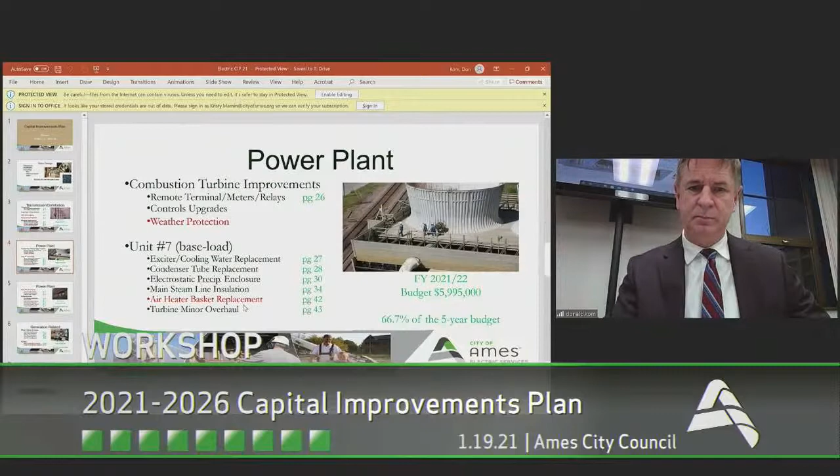Looking at Unit 8, as you're aware, we're about to start work on replacing some superheater tubes. That's in this year's budget, so that's why you're not seeing a sheet. However, that is the main step in how we're going to fix Unit 8, and we think it will operate just as well as Unit 7 has since we replaced those tubes.

The two other projects, again, you've seen before: the precipitator reconstruction, and in Unit 8 we'll be doing a turbine minor overhaul. Those sheets are found on 35, 40, and 43.

From an infrastructure standpoint, we're continuing work on the plant building itself. The reason I have this in red: we're about to begin a modification to the bathrooms. If you picture a plant built in the 40s, it's generally set up for male bathrooms and male showers. We're moving towards a unisex bathroom since we've added females to our staff, and we need to bring our plant up to today's standards. We'll be doing that in this next fiscal year.

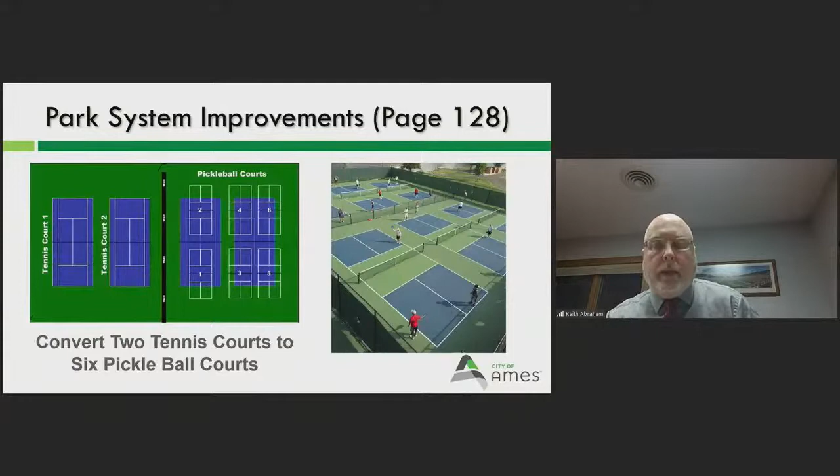So with park system improvements on page 128, this we did put in last year: converting 2 tennis courts to 6 pickleball courts at McCarthy Lee Park. We did receive a lot of feedback on this last year, that's why it was put in, and we'll continue to move forward. That is in year 21-22.

Weight room equipment - obviously we're hoping that the Healthy Life Center would pass, but the fact that it didn't, we do need to replace this equipment, so this is something that will be coming up in the next few years. So Carr Park bathhouse, we are going to be demolishing this, and then replacing it with a shelter and a restroom, and then we'll be putting some equipment out there for play and so on as well.

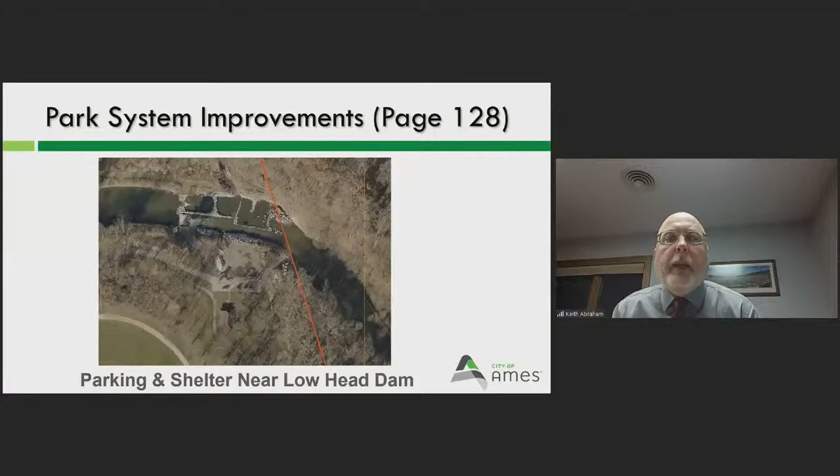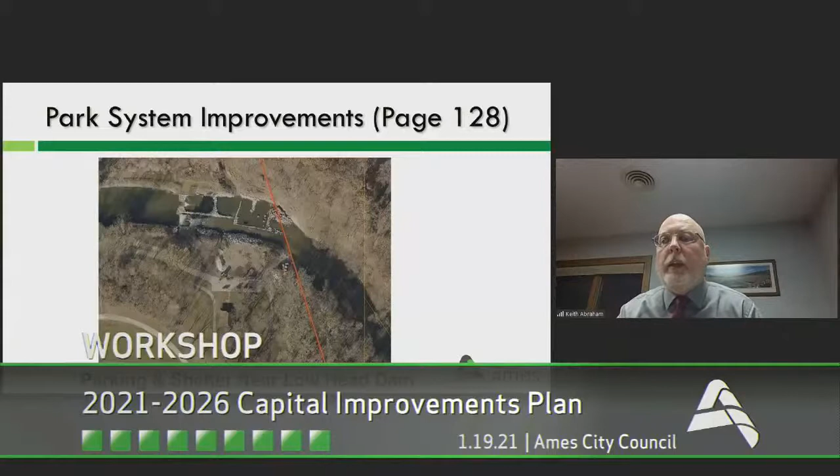What we really want to do is we actually have money in the CIP to replace the parking, also to put a new shelter in and new play equipment. We want to put the parking more to the south or bottom of the picture, and then have the shelter and playground to the north of the parking. Right now, if we left everything as is, if kids or people wanted to move from the shelter or play equipment down to the water, they would have to cross the parking area. So it's just something we want to do as well.

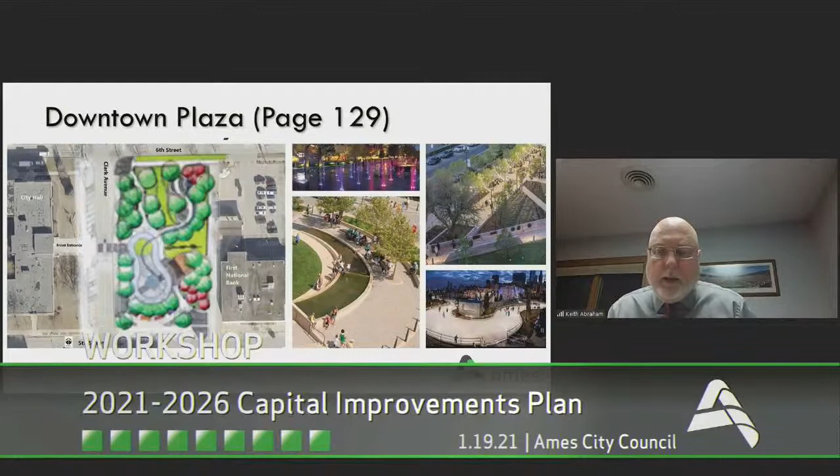If we move on to page 129, the downtown plaza, I'm not going to spend any time on this because there's a public input meeting on Thursday evening at 7 o'clock. The Confluence will be going through more in detail the concept and what that's proposed to look like. And then we'll be bringing more information to council next Tuesday, the 26th.

With Ada Hayden, again, this is another project that we put in last year. There is a group out there called Access Ada Hayden. So this is a canoe and kayak access. You can see you can put your canoe or kayak in, slide it down to the water, and for people with disabilities or mobility issues, they can do those kind of steps, get out and over their kayak, and lower themselves into the kayak. You can see an individual coming back in from being out on the water.

Right now with that, we do have $85,000 in the budget. $50,000 of that is local option sales tax, and $35,000 of it is from private donations. Just before the holidays, I did speak with that group, and as of right now they have raised about $22,000 out of their $35,000. So they're well on their way and continuing to do that. Again, it's a really good partnership between the city and another group out there to get this accomplished.

Playground equipment improvements—this is Sunset Ridge that was put in last year. On this page, there are 17 playground replacements over the next 5 years. This is something we have a plan for that goes out to about 2040, to replace all of our playground equipment.

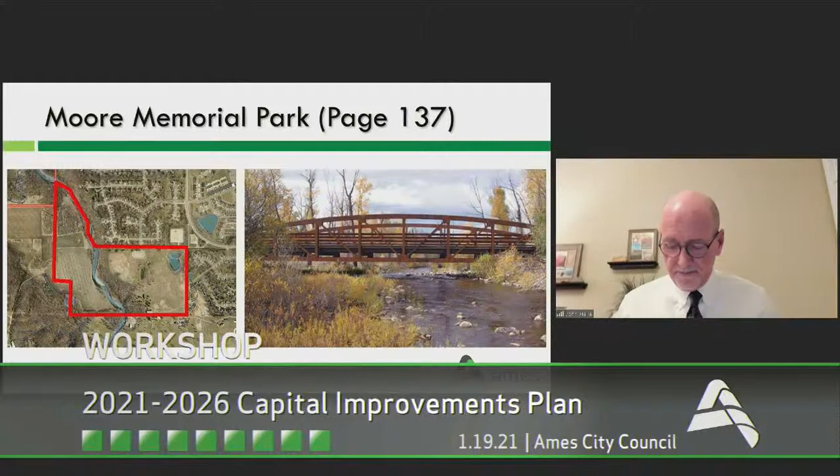Questions for Keith on this one?

Keith, is this going to be installed by your own staff? Is that $75,000 in the budget just for materials, or? Yes, it'll be materials - it'll be concrete. A lot of what you see, benches, some landscaping, a lot of that will be included. But the goal would be that our staff would install it, because it's a very attractive addition to that area, and certainly long overdue.

But it just seemed like the $75,000 seemed to be fairly modest for the beautiful concept. So I was just curious if the budget went over, I presume you have resources to draw upon to make up that difference to accomplish the project. Let's hope so. Okay.

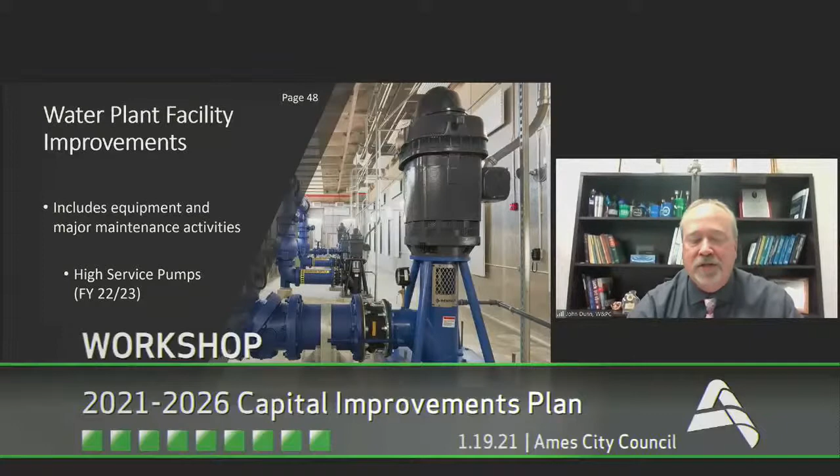So that's just one example of several I'm going to show you of how projects from multiple departments are all kind of interwoven together.

Page 49 is our distribution system monitoring network. This is going to allow us to do real-time monitoring of multiple locations in the distribution system. Right now, there's just a handful of spots that we can see, and getting more data points coming in will allow us to detect water main breaks quicker.

By triangulating between multiple sensors, we can pinpoint quicker where the location of a main break might be. It'll also, in the event of a major main break, allow us to be quicker and more precise in delineating boundaries around where a boil water advisory might be needed.

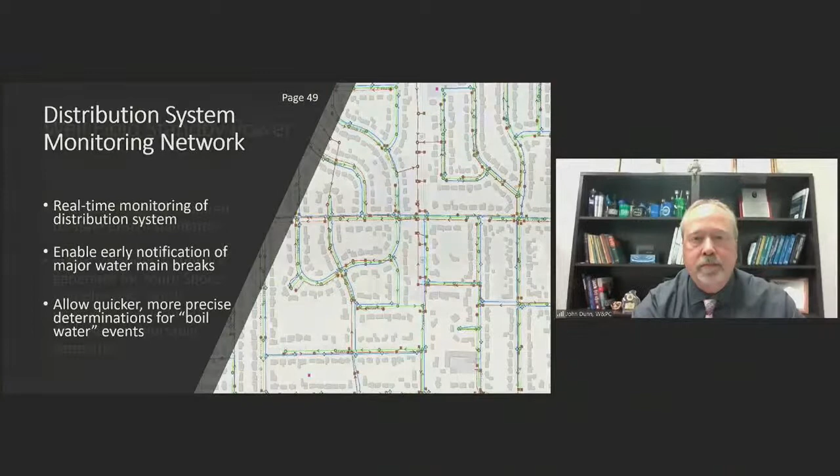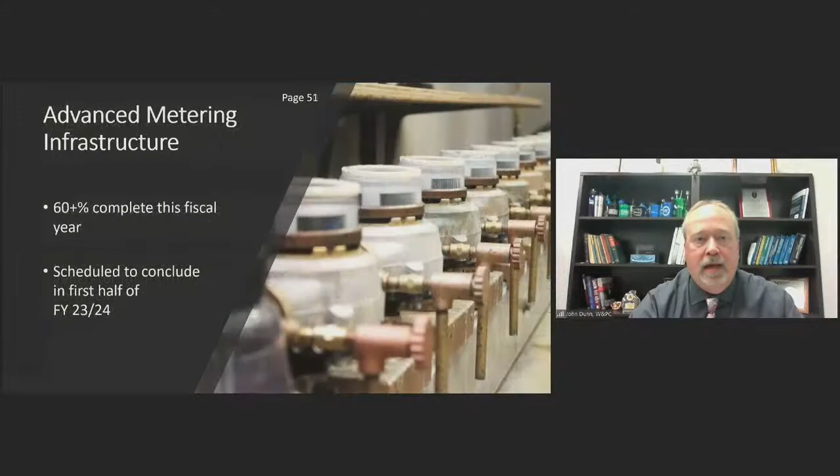Page 51 is our project for doing the advanced metering infrastructure conversion. The big highlight here is that the cost is down from what we showed a year ago. That's because we've shifted a portion of those meters out of the capital plan and into the operating budget. Our intention at the end of this project is that the CIP page can go away and the operating budget can continue at a level funding.

As we were looking and evaluating this time around, we decided we needed to reallocate a few more meters into the operating budget. So there's a cost decrease in the CIP, and in a few weeks you'll see a corresponding cost increase in the operating budget for the meter division.

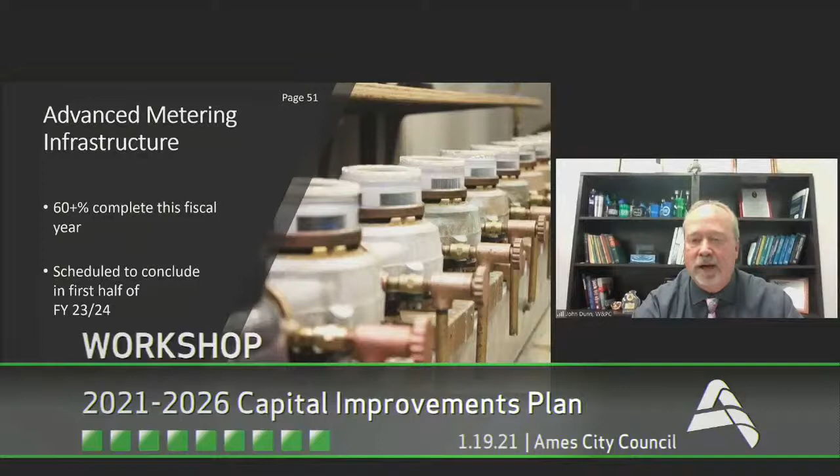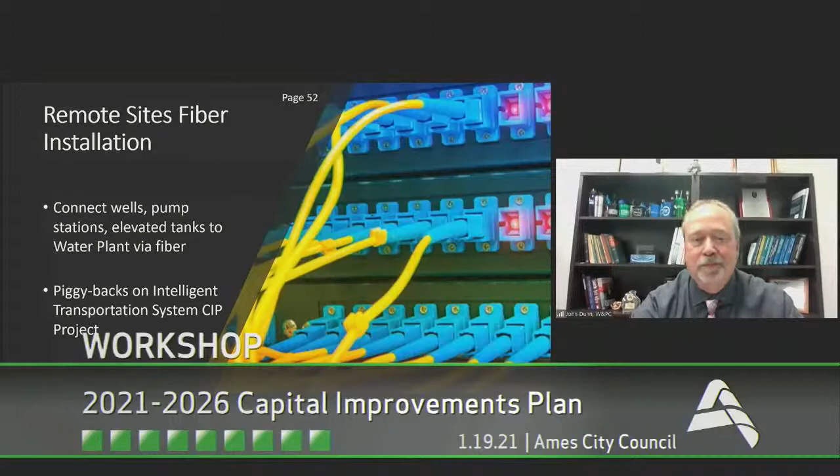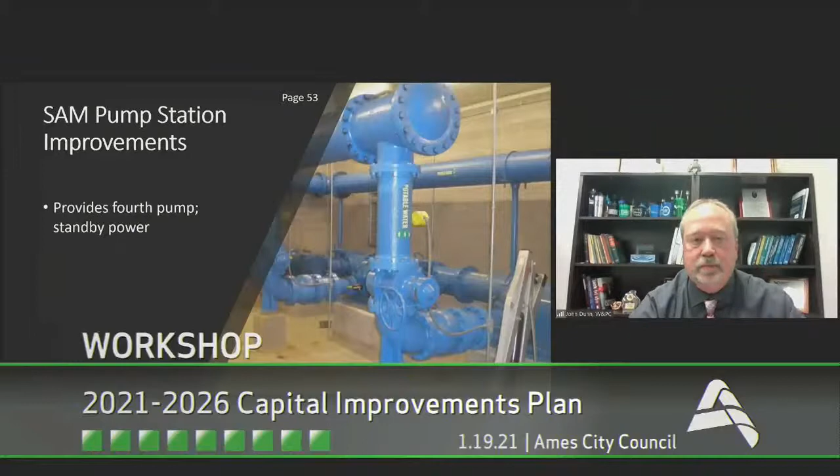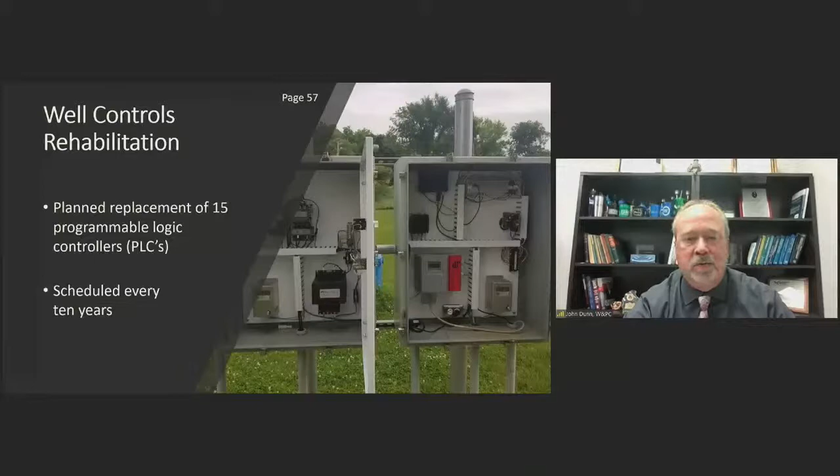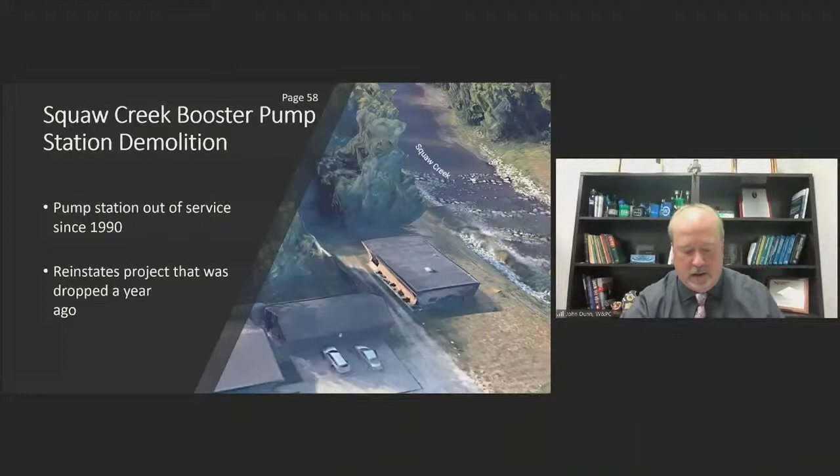So that's everything on the drinking water side. Now we'll slide down south and look at projects related to the water pollution control facility.

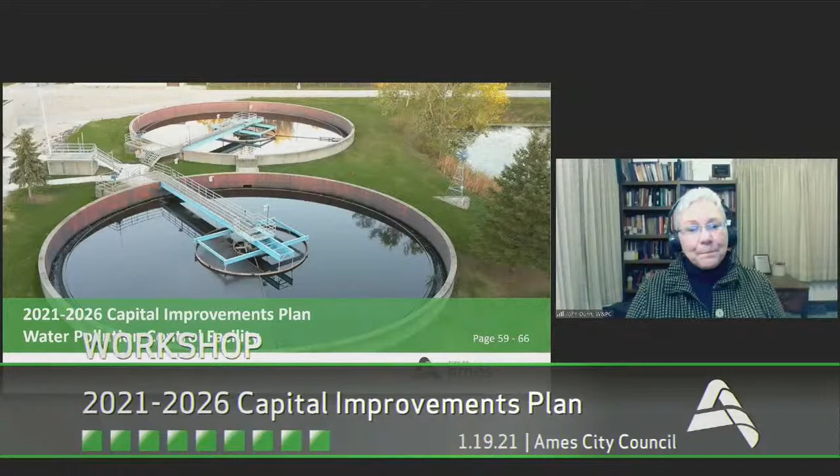Any other questions for John? I had two quick questions. One is, in your plan, if we lose power from the power plant, will we be able to provide not full 100% water capacity, but through backup power on the wells - I presume you have generators at the water plant - continue to replenish or keep the water towers filled to avoid a catastrophic loss of water? Is that correct? Yeah, that is our intent.

And I should have mentioned when I touched on that generator project, we show it in the CIP with a majority of the funding coming from a hazard mitigation grant. We've already started that grant application process. A lot of details to work through, but the initial indication is it should be a fundable project for us.

Thank you. The other question is on the water tower project. I know we're still getting water and sewer out there - I think they're taking bids or have taken bids on that. I know the type of buildings that are going to go in out there may require sprinkler service. So if the tower isn't built, will there be adequate water pressure initially to provide service without the water tower?

We are working with partners including the Squaw Creek Watershed Management Authority, Prairie Rivers of Iowa, Story County Conservation, the Iowa Soybean Association, and most recently some new partnerships with Ducks Unlimited and the U.S. Fish and Wildlife Service. Some of the types of projects we're looking at trying to support include construction of wetlands and some oxbow restorations.

With the Soybean Association, what we've really been focused on this last year is supporting cover crops on farm fields. In fact, the Soybean Association has reported to us that from the program this past summer, we were able to remove more than 60,000 pounds of nitrogen that would have otherwise been released into the river, and just shy of 4,000 pounds of phosphorus.

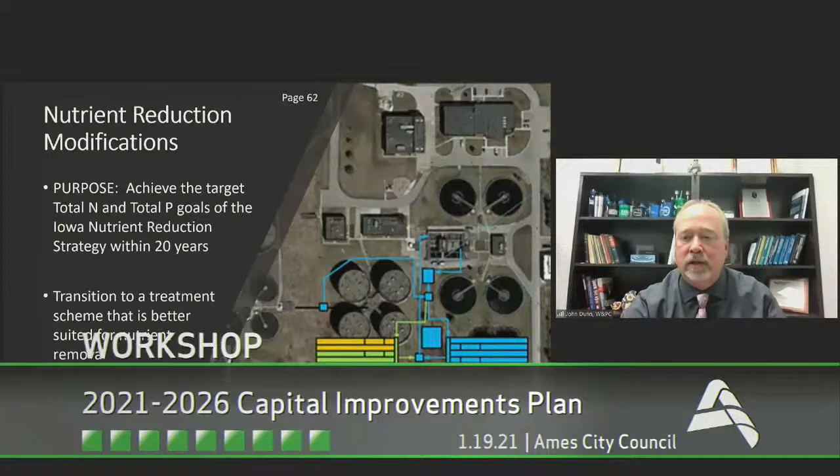And that gives us really 2 main benefits. One is it lets us spread out the cost impact and the impact on rates to our customers over a period of 20 years, as opposed to having to swallow that whole cost at one time. The other thing it gives us is the ability to make incremental capacity improvements to the plant. Normally when you're doing an upgrade to a facility, you don't get to pick up another fractional million gallons per day. But since we're doing this in 3 phases over 20 years, that gives us 3 bites at a capacity apple over the next 20 years. So we don't have to guess right up front what the capacity is that we're going to need 20 years down the road. We can grow into it as we need it.

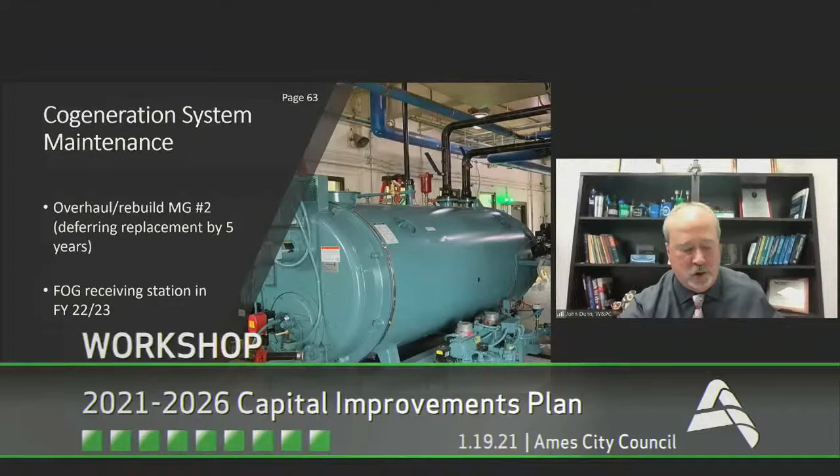Page 63 is our cogeneration system. The change in this project from what you had seen originally is that instead of planning to replace our methane generator number 2 during the 5-year period, we've changed to just doing a major overhaul and rebuild on that cogen set and deferring the replacement of that unit by 5 years. We've had a couple different consulting engineers tell us that long-term, cost-effectively, that's a much better choice for us. So we've made that alteration to that project.

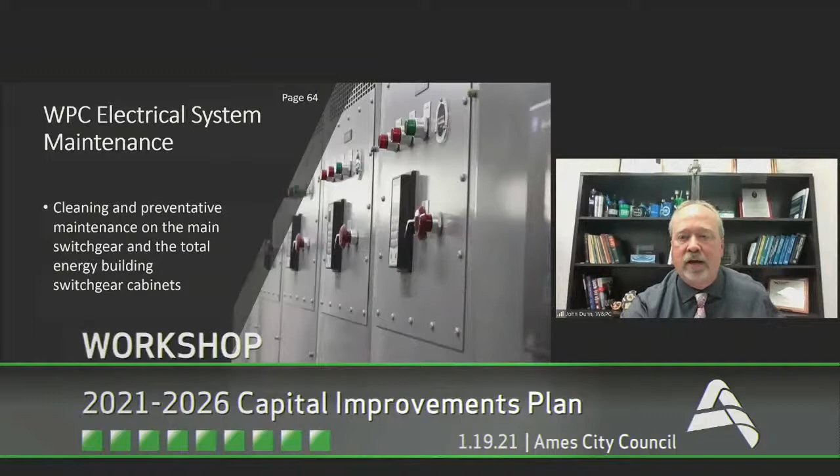Page 64 is our electrical system maintenance. This is one of the projects that's not real flashy, but it's really important. These aren't the types of equipment that you could just walk into an electrical wholesale shop and pick up off the shelf. So we go in every 5 years and have a contractor clean out the cabinets. They inspect the bus bars for corrosion. They make sure all the lugs are tight. They do thermal imaging looking for failing insulation. Really important to maintain the continuity and livelihood of the facility.

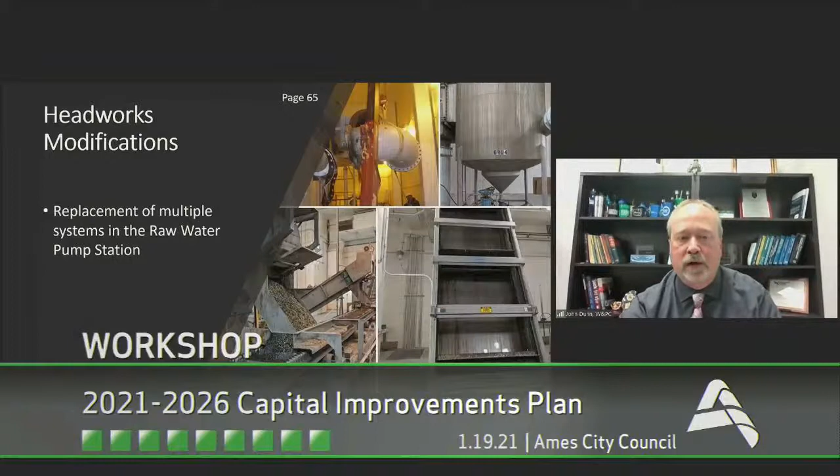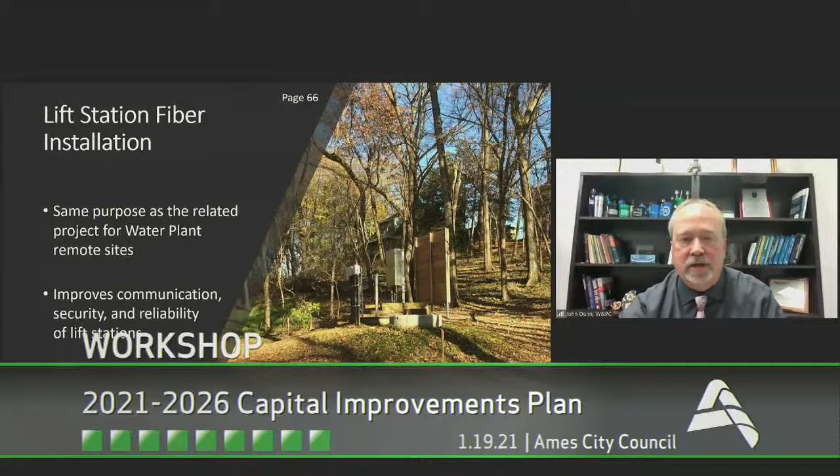So to wrap up, I wanted to share this quote. This is on the backside of the monument when you leave the new water treatment plant. Here's your explanation as to why we're looking at spending and investing $37 million in these facilities over the next 5 years: water is the lifeblood of our bodies, our economy, our nation, and our well-being. So with that, I'd be glad to answer any additional questions.

Any questions for John? Well done. Thank you, John. Thank you for your time this evening.

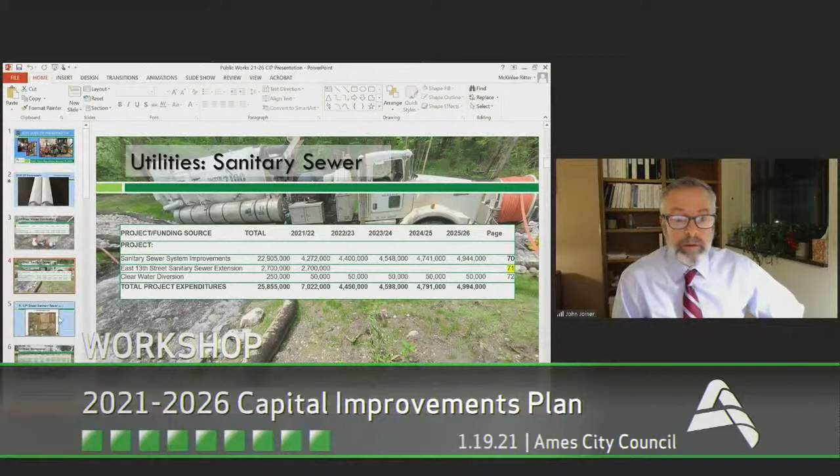The one program I'd like to highlight on the next slide is the East 13th Street Sanitary Sewer Extension. This would extend sanitary sewer from Dayton Avenue east across the interstate through the regional commercial area and then through to the eastern limit of the industrial area east of the regional commercial. As you see in the CIP on page 71, this would be financed through TIF abated GO bonds. We would have a TIF district created with the first buildings that go up out there so that the utility or the general tax base wouldn't have to pay for this project.

Next in utilities, we move into the stormwater program. You can see there's a variety of annual programs that we have: stormwater erosion control and stormwater improvement program, stormwater quality improvements, and then some specific projects.

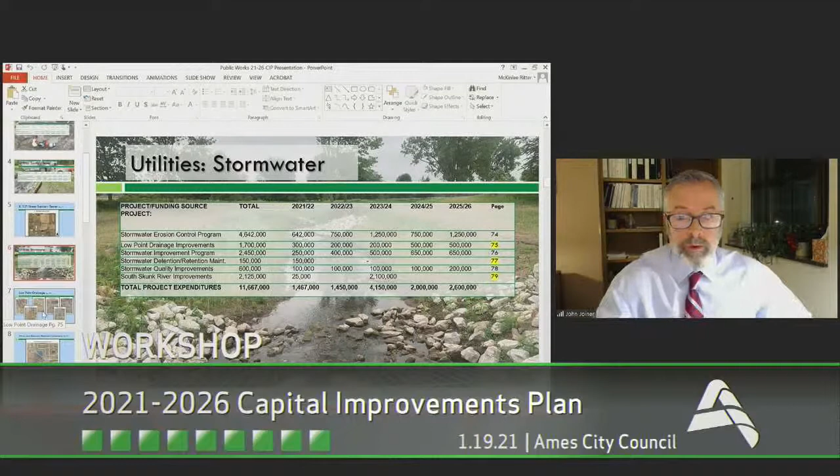I'd like to highlight the low point drainage program on page 75. This program is intended to address areas, mainly in the right of way or other public type areas, that have poor drainage and are causing flooding and other area difficulties. We have 6 different areas identified for the 21-22 fiscal year of the program.

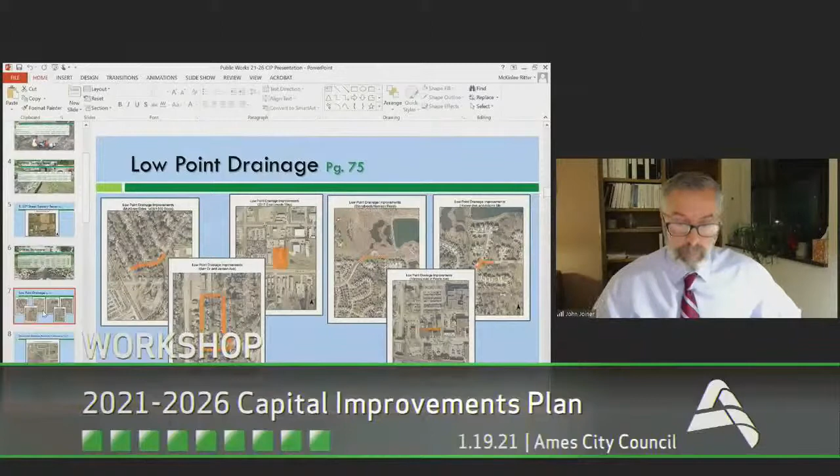Next, we have the stormwater detention retention maintenance program. The name would appear new to you, but the program isn't — this used to be the stormwater facility improvement program. We've just tried to rename this to be more accurate and reflective of the work that we have going on under this program.

The project that we have planned for 21-22 is on George W. Carver. If you were to go west on Bloomington and then start around the curve towards Gilbert, that pond is in the Northridge Heights southwest corner there.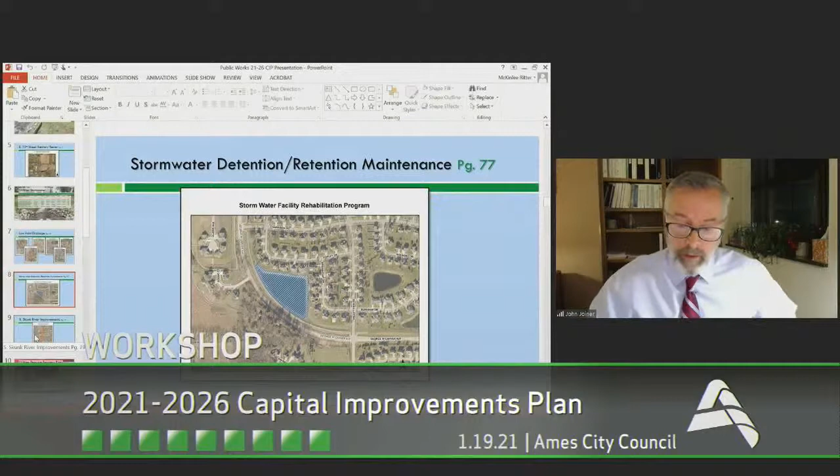Then the last program that I wanted to highlight in the storm sewer program is the Skunk River improvements. That's on page 79, and this is a new program.

The first year in 21-22, what we're trying to do here is take a look at the southeast 16th bridge and the flow capacity that we have through and above that bridge in the roadway. The DOT is planning in the next few years to make capacity improvements on Highway 30 for the Skunk River underneath those Highway 30 bridges.

So we thought that we should take a look at the capacity issues, if any, in the southeast 16th and Skunk River area, and see if there's any improvements that can be made to help facilitate the flow of the Skunk River through that area. Then in the third year, if we jump ahead, Tracy, if you're able to chime in, maybe you want to briefly go over what we're looking at in that year.

Sure. So as John mentioned, this is a new program. What we are looking at for that third year is, in partnership with Water and Pollution Control, a project that's SRF funded. There are water quality grant opportunities that can come with those. So to not negatively impact larger flows downstream with the increased capacity under Highway 30, we're looking at watershed improvements to deal with both flood reduction and water quality in that area between East 13th and Southeast 16th. That is a third year project for $2.1 million, and again that would be an SRF grant as we move towards that.

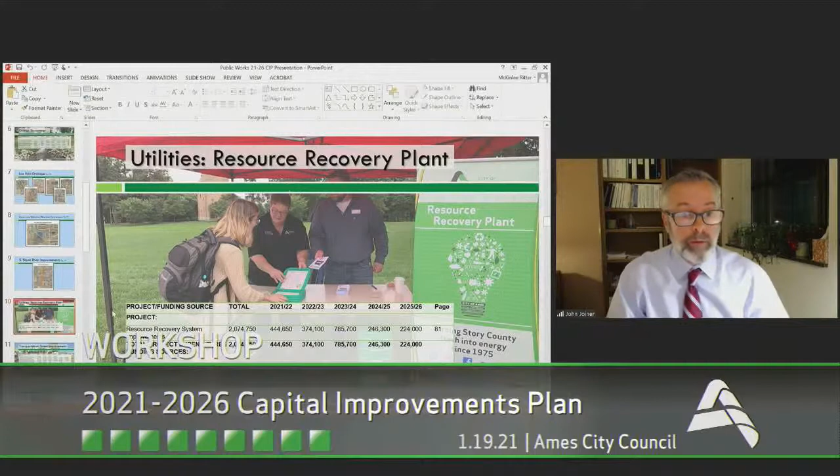Next, we move into transportation. John, can we just pause a second and see if there's any questions on utilities? Absolutely. Any questions for John?

John, I'm wondering about page 75, the low point drainage improvements. A lot of these are in my ward, so I know a lot of the problems that have led to these improvements being necessary. What's the logic in the order in which the projects are being done? Are those in conjunction with other things that are being done in the same area, or is there something else there?

Tracy, do you want to comment on that? Sure. So a lot of these came out of the 6-inch rainfalls that we had in 2016 and 18, and several of them are coordinated with roadway reconstruction projects as well. So some of those you see in that low point drainage are road reconstruction projects we're currently working on, and those will be partnered together. Some are standalone, and there's a large scale, from more complex to much simpler, like the one on East Lincoln Way, where we're thinking it's probably a trench grate across East Lincoln Way with our frontage road. So some of them are more complex and some are more simple, but that is how we prioritize those.

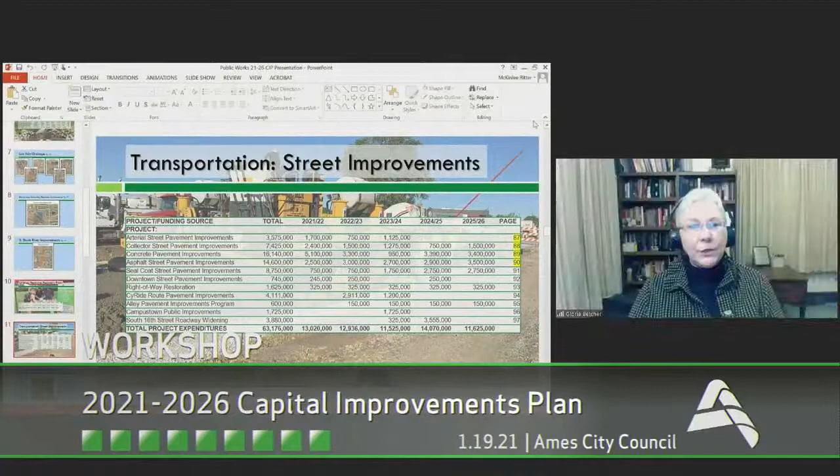Thank you. Other questions for Tracy? John or Tracy?

Tim, go ahead. Well, we have spent a tremendous amount of money over my tenure on council on surface water, and I think it's fascinating. Quick question: is there a way for a community like ours to be able to rate, are we getting better at surface water? I was really interested by an analogy Damien shared with us a couple years ago, that roads could be rated in terms of A, B, C, D on their safety. Does the modeling that the city performed allow us to evaluate if in fact we're making progress on how we're handling surface water?

So yes, I think we are, though I don't have numbers to back this up. There are several different ways - we've done stream assessments, and we could do an updated stream assessment to analyze the erosion in our streams and river. There's also, as you heard John Dunn mention, the pounds of nutrients that go downstream or that we've pulled off by doing improvements. We are going to be kicking off the stormwater system analysis this year. We've been doing the surveying portion because we needed survey-grade information on our storm sewer systems, and we'll be doing analysis looking at capacity - is that surface water getting into the intakes, is the 6-inch rain too much to handle? But that's more of a 100-year event, and we say we're going to manage a 5 to 10 year event in our stormwater system. So there are different aspects to surface water that come into play - there's not one single answer, like the A, B, C, D we have with the transportation system.

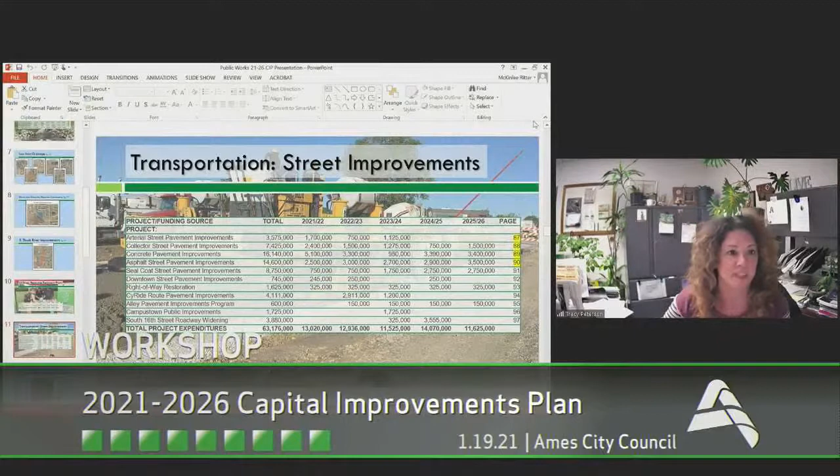Thank you. Bronwyn, you have a question? Yeah, I had a question about the East 13th expansion. Is that dependent on financing with TIFs, or getting a development there? I see that's in the first year of the CIP. Are we sure that project's going to go through, or if there's a holdup in the timing, will we delay the extension of sanitary sewer out there?

This would be dependent on negotiation with the developer and getting a development agreement in place, so we know they're committed to the building and to a certain value, that we can go ahead and get that TIF district created.

Okay, then that property valuation they commit to, and the TIF generated from that, is what's used to pay for the sewer. Good. I just want to confirm that if for some reason there weren't a project, we wouldn't still expend that. Right. Okay, all right.

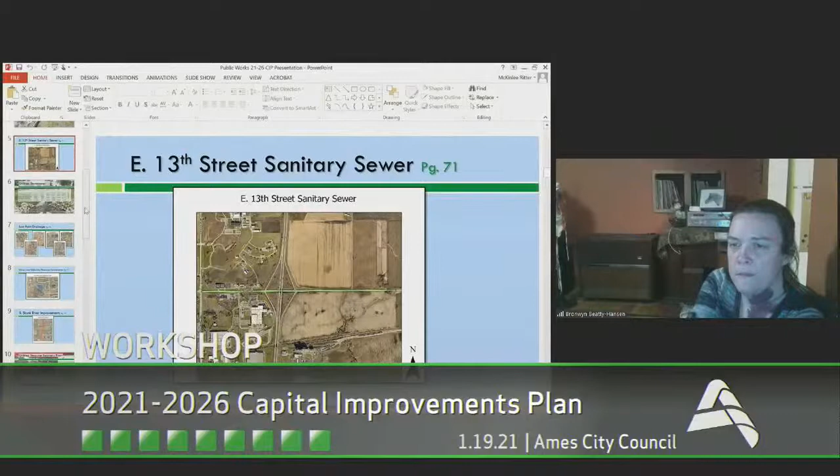Thanks. Other questions for John or Tracy? Just a quick comment, John: on page 16, at least in our draft books, page 69 under East 13th Street Sanitary Sewer Extension shows $2.5 million, but you showed 2.7 on page 71. I don't know if that can get caught when they're doing the final version. Yeah, I thank you for pointing that out.

I think the version that's going online has been corrected to show the 2.7 million, and finance is aware and has made those adjustments. Thank you for catching that.

Tracy, I'm intrigued by the Skunk River project. Are there opportunities to actually make some enhancements that would be recreational in nature? I don't mean lighting, but bike trails, walking paths, overlooks—things that could be developed. Obviously we don't have beaches and mountains here, but we do have streams.

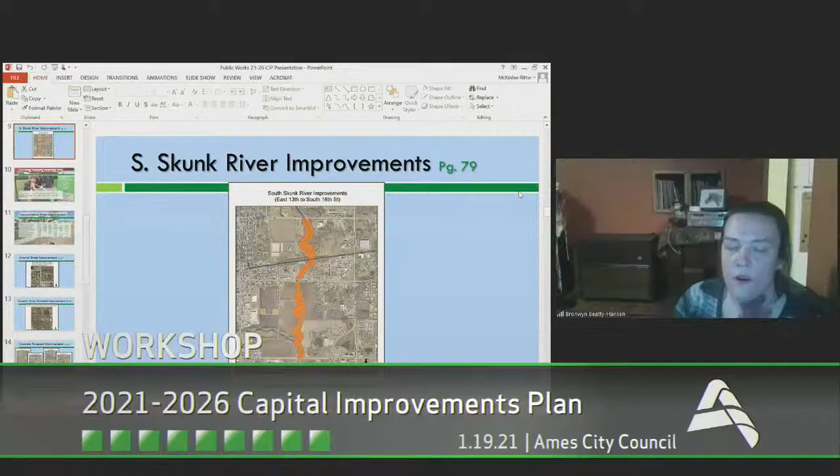Starting off in the transportation program, we have street improvements. I'd like to highlight the first four programs individually, but before that we have the Seal Coat street improvements on page 91. That program is specifically targeted towards local streets and repairing those.

We have the downtown street improvements on page 92. If you turn to that page, you'll see that program is kind of winding down. I believe the 2020 or 21-22 program is the alley by Burger King and Harold Pike.

Rounding out the first year 21-22 projects is our annual right-of-way restoration. That's where we come in behind the projects and restore the area that we've just improved the street in.

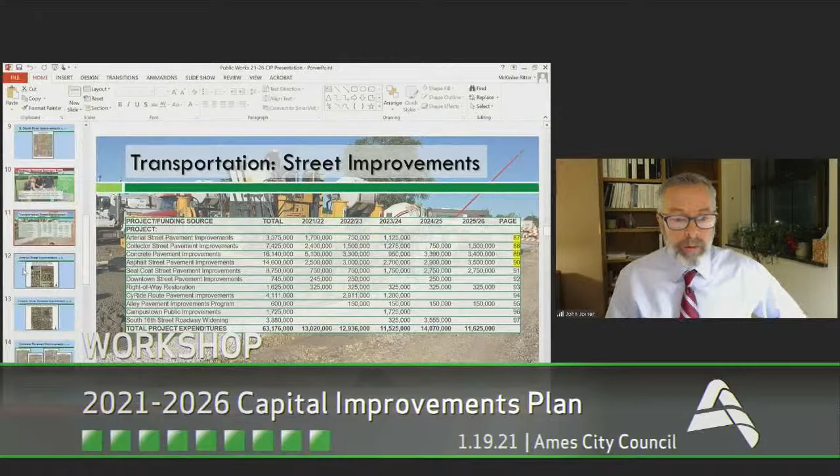The first one I want to highlight individually is the arterial street pavement improvements on page 87. The location you can see here is by Sawyer School. We're beginning in Ontario, the first block east from North Dakota to Woodstock, and then North Dakota from Ontario up to the UP tracks.

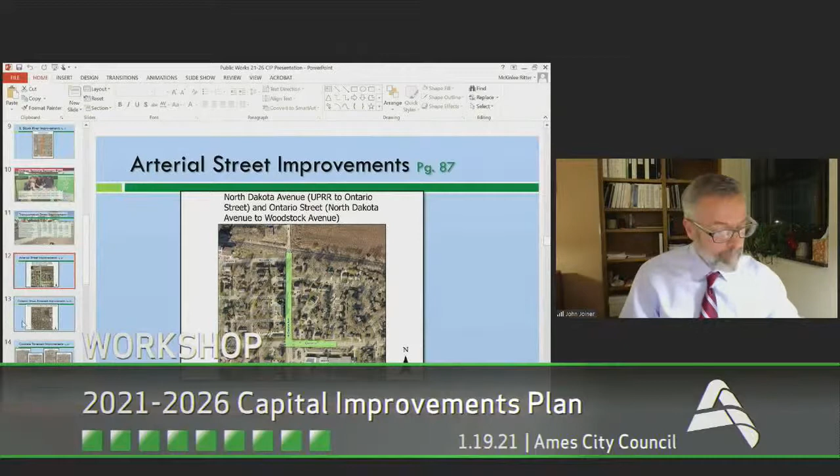Then for Collector Street pavement improvements, that's on page 88. We'll be doing Hoover from 24th Street to Top-O-Hollow.

Bob Kindred was always fond of pointing out, or amazed at pointing out, when locations would roll around twice in his career. This was one of the first projects I worked on here, realigning 30th Street in Hoover. So this is at least the second time in my career I've seen this area.

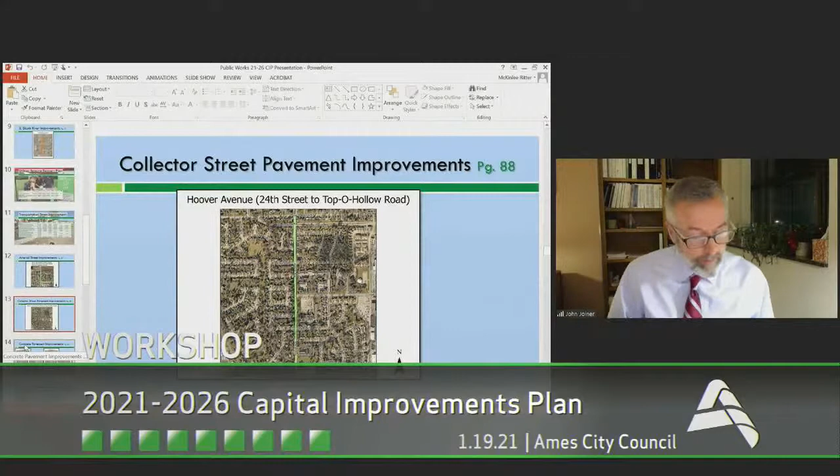Then next on page 89, we have concrete pavement improvements. We'll be doing four different locations: Stange Road from the Vinker driveway to 24th Street, and then 24th Street over to the railroad tracks. We'll also be doing a portion of North 2nd Street and about a one-block section of South Kellogg.

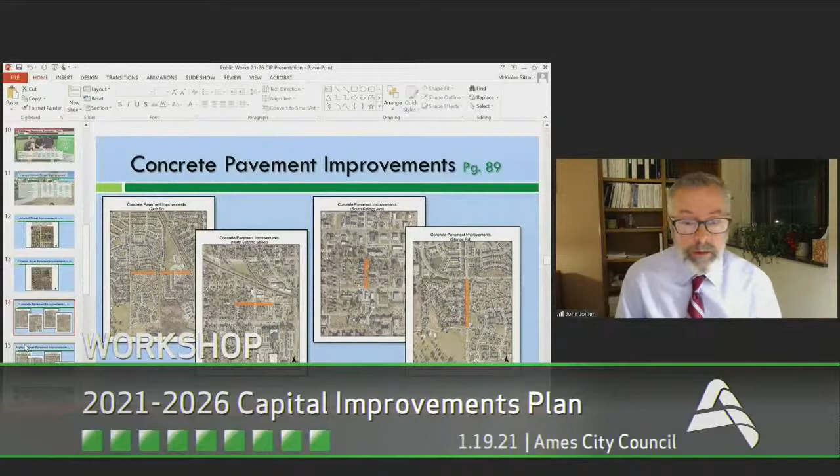Next on page 90, we have asphalt street improvements. Under this program, we'll be getting several different areas around town. Three of those will be in the Southdale area - Opal Drive, Opal Circle, Turquoise Circle. And then moving north again, we've got Harcourt and Top-O-Hollow Road.

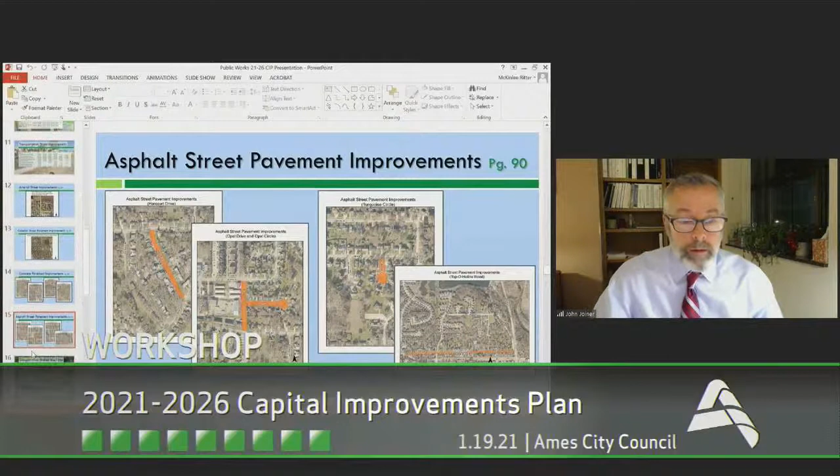From there, we move into the shared use path portion of the transportation program. Some of the annual programs here include multimodal roadway improvements and shared use path maintenance. There's been a great focus on joint maintenance under that program.

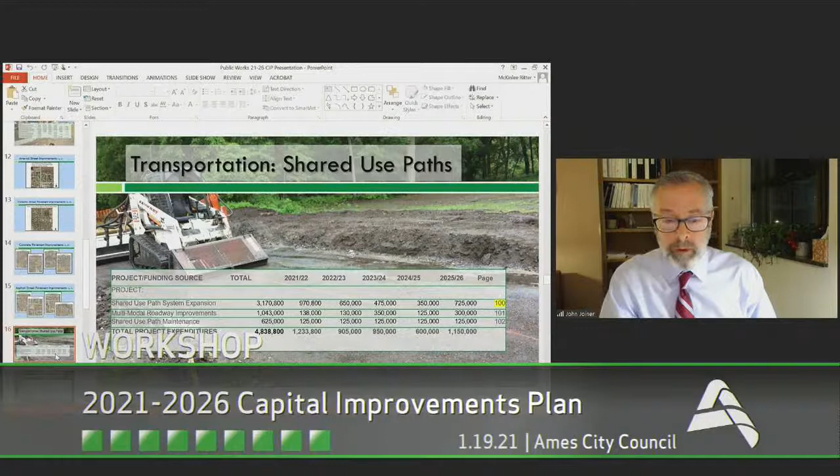For shared use path expansion, we have two locations planned for 21-22. We have a continuation of the south of Lincoln Way path, which will eventually connect Beedle Drive to the Arboretum area. We have the most western section under contract; 21-22 would complete the middle section, and then we have the eastern section along with the Baker subdivision improvements.

Also in shared use path expansion for this first year of the program, we'll be looking at the Squaw Creek Trail that would connect South Duff back over to the, hopefully not too far in the future, Skunk River Trail from Southeast 16th to East Lincoln Way.

Next, we move into traffic improvements. We have the traffic signal program - I don't have a specific individual slide for this, but the background of this slide shows the location for that improvement. It'll be South 4th Street and University Boulevard.

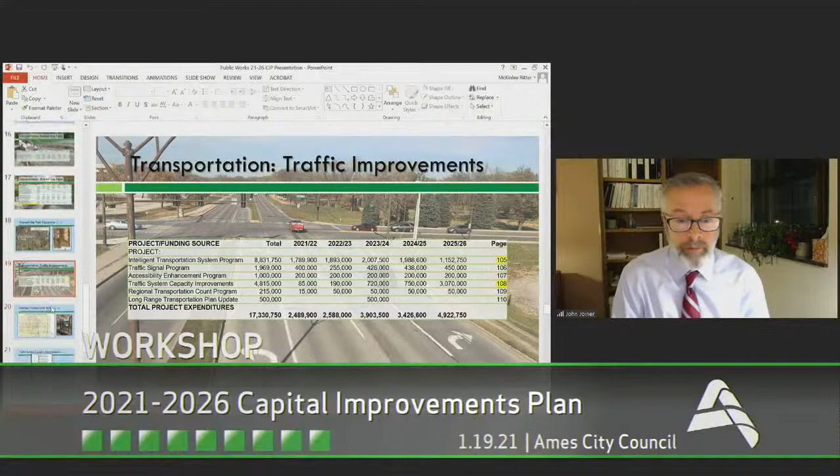So a couple of programs I'd like to highlight individually. On page 105, we have the Intelligent Transportation System program. This will be the traffic communication network that will be the backbone of our traffic adaptive system.

We've previously received a grant to do phase 1. We were just informed - Damion, I think, got a letter this week from the DOT - that we've received a grant for phase 2. Those grants combined, along with our design grant, are well over $2 million. So the DOT has continued to be a big supporter and a great partner in us moving forward with this program.

Next, the other one I want to highlight individually is page 108, traffic system capacity improvements. This is a new program in the CIP, driven from the most recent update to the long-range transportation plan. We identified several corridors that need to be analyzed for safety and capacity improvements. The first one we'll be looking at is the Grand Avenue corridor, from 9th Street to 24th Street.

Any questions on the shared use path or any of the traffic programs before we move on? Any questions for John? John, are we still receiving input from the Ames Bicycle Coalition in terms of prioritization of the projects? Yeah, they've been a good partner and good input for us.

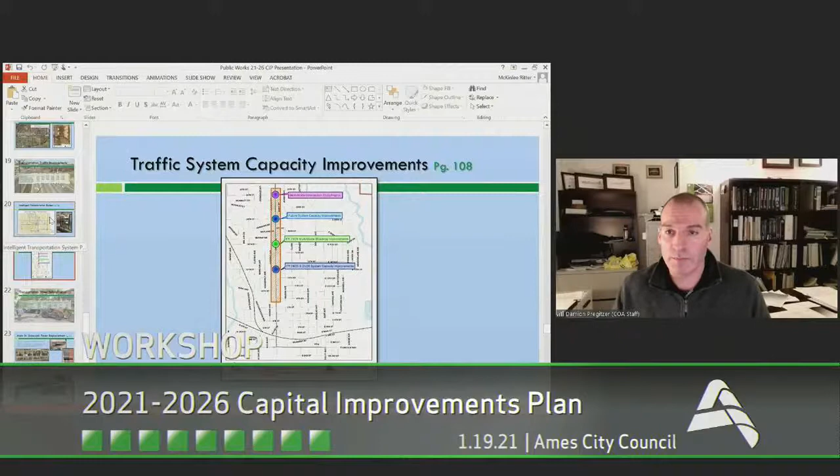And then how about the ADA intersection improvements? Is that part of that too, or is that separate, in terms of the audible and tactile sensing announcements at the crosswalks? So technically, from a funding perspective, it's separate. The ITS program just does the technology upgrades, but what John had talked about with the accessibility enhancement program, that funds all the ramp improvements, the vibrating, tactile, audible push buttons. So if we're in the area, we might pull from a different CIP project for that location. So it happens at the same time, but it comes from different funding sources in the CIP.

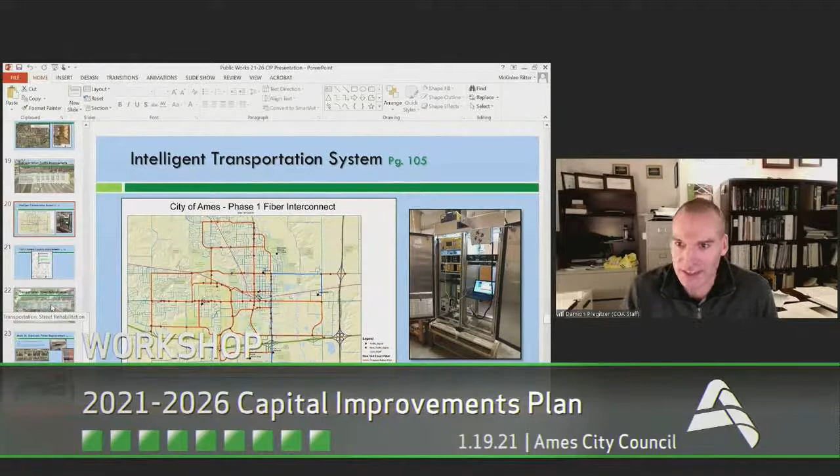Sorry, it just tickled my funny bone. I thought, that doesn't look very professional putting it on a wooden pallet somewhere. But it's a fair question. I don't think that would survive the derecho, so I think we'd want something sturdier than that. Sorry for the bunny trail there.

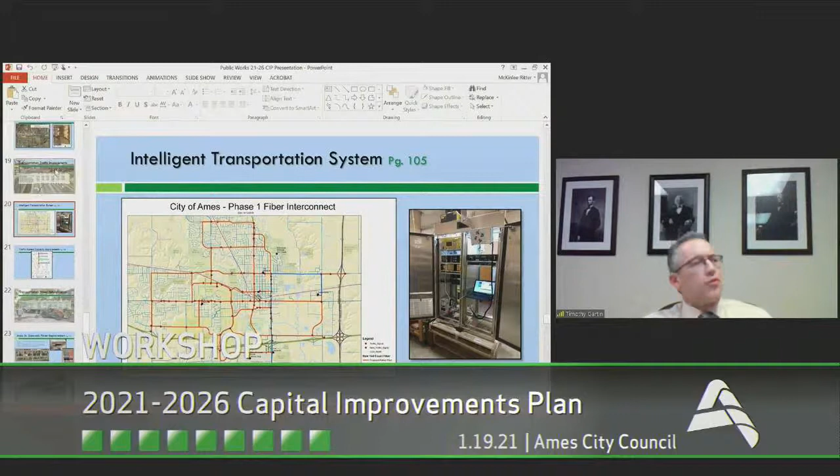Any other questions for John or Damion? Thank you, Damion, that was a good comment. So John, where do we see the extension of the bike trail on South 16th towards University? I'm on page 100, I don't see that on there. Am I missing that? I know we're working with Iowa State on the expansion of South 16th.

That's a standalone program in the CIP, and I didn't highlight it individually because I think it's in the 4th year. But when we do those improvements, basically west of that Vet Med Trail over to University, we'll look at those accommodations along with that. It's page 97. It'll be incorporated into the project, right? Right.

So that's a huge improvement, and I don't know if that's worth putting a footnote, because if someone's looking at the expansion on page 100, they might not know to look at it. I wouldn't have known to look at that, but that's included there, and it's going to be a huge improvement to the system.

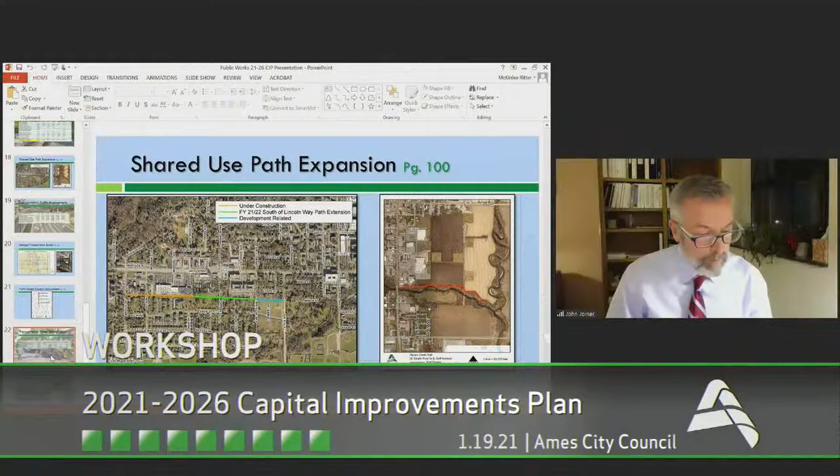Then we continue in the transportation program with our street rehabilitation. The 3 first-year programs we have are pavement restoration, which is pavement maintenance activities that are either too unique a technique for our own crews to do, or maybe the project's a little too big for our crew to take on.

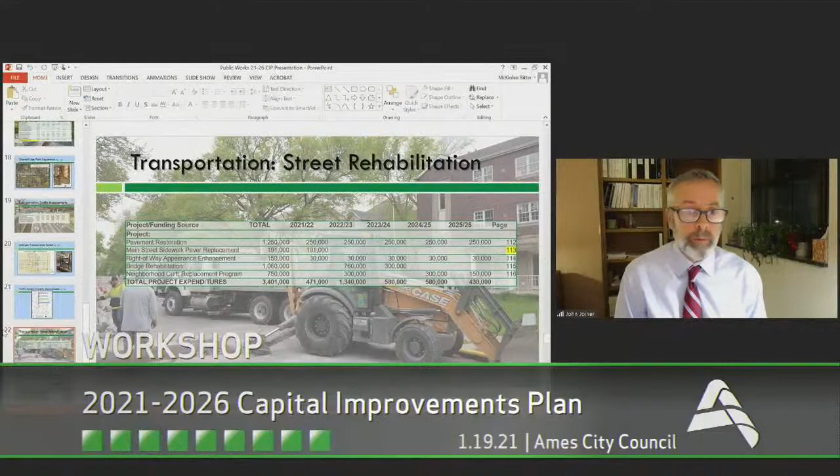That's more of a pavement maintenance type program, on page 112. Then on page 114 we have a right-of-way appearance enhancement program, which is kind of a catch-all program - retaining walls, median improvements, signage. Then the one I wanted to highlight individually is the Main Street Sidewalk Paver Replacement Program, on page 113.

The mayor caught a typo we had in the description - a holdover from the previous description. You remember at one point we planned on doing colored stamped concrete, and then Justin Clausen presented a report to council on the new style pavers we're going to use that are much more durable, much more resistant to chemical attack from the de-icing. So we are going to use those pavers as council directed us. That's just a typo that we'll have corrected in the description.

The plan is that we'll progress from west to east. As you see on the schedule, through this summer of 2021 we hope to have all 4 of those phases bid and hopefully moving forward on construction this season. Any details on the schedule, Justin, that you want to add? I think you've got it pretty well there, John. Okay, we can take questions now or at the end, however you want to do it.

Okay, good, thank you. Then the last program we have in transportation is airport.

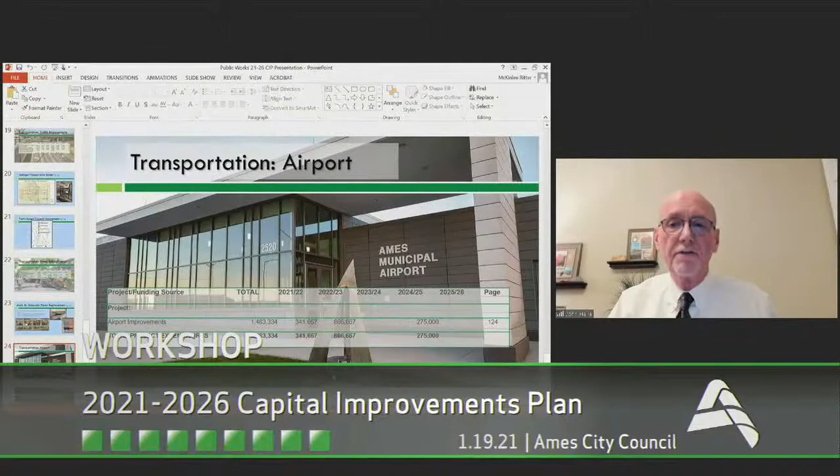John, before you go any further, on Main Street, just a quick question. If council wanted to provide some outdoor seating areas along Main Street, outside some of the restaurants or coffee bars, given that we're looking at design the rest of this year, which I think we'd be excited to see brought to completion, what would be the timeline to talk about that? Would that be right away, or is that too late? I'm just saying, like if you have like in front of Sheldon Munn, we have that larger area shaded blue - not something that big, maybe half that size. I'll just say in front of Olde Main for sake of discussion, just for some outdoor seating if council wanted to do that, or a lot of conversation has to go on that.

It's not just a matter of dropping that in, but with that enhanced schedule. Yeah, I think for this program, we want to focus on getting these pavers replaced and focus on that hardscape improvement. And I don't think that anything we'd be doing with the pavers would preclude any type of furniture streetscape. Is that right, Justin?

Correct. Most of the stuff that happens from a streetscape standpoint, benches, seating, that sort of stuff, is temporary anyhow. A lot of times it's either anchored via an adhesive, or sometimes it's physically anchored using some sort of drilled-in screw type anchor. But I don't think any of that would preclude anything that we're doing.

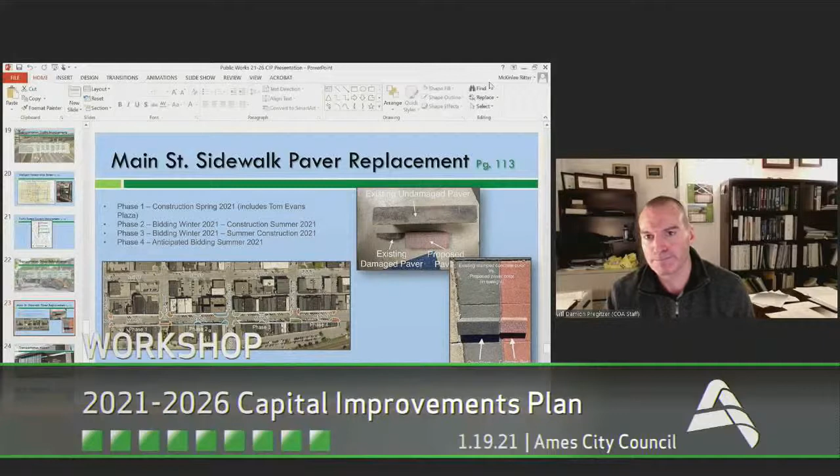All right, so the last program we have in transportation is airport. For the airport improvements, the focus will be mainly on lighting improvements. Our first and fourth year will be lighting improvements, and then the second year will be apron improvements just outside of the terminal.

If there's no questions on airport, then that concludes our transportation section and all the public works programs in this version of the CIP. And try the video again, John? Yeah, we'll give that another run here, see if we can get that to play. Looks like it's going.

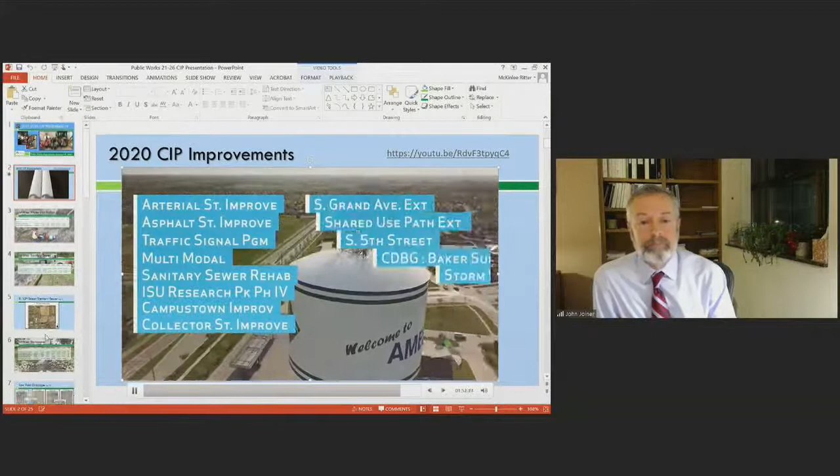So I want to thank Channel 12 Media Production Services for putting that together for us. Pretty cool video. So thanks to them for that, and thanks to all our field crews and engineers that carry these projects out and make sure they're done correctly for the community.

One more question, sorry. So South Fifth, I've already been raving about this to council, but it's an amazing addition. Will the bike path on the south side of that continue on to Grand Avenue? Yeah, and then Grand Avenue path will both follow the roadway as well as connect on the other side of the creek with the Vet Med Trail.

And eventually you saw the Squaw Creek Trail and the shared use path expansion. Eventually all that will connect together. Wow, outstanding. Really, really great improvement. Lots of people using that South Fifth extension already.

Good, yep. John, that question reminds me of another one I had related to bicycle facilities. That Campustown Improvements page in the CIP mentions extending the bicycle facilities on Welch Avenue, and it says from Union Drive to Mortensen Road. And I know Welch Avenue stops at Storm, and then we get Institutional Road on Welch Road. So where is the bicycle facility that connects from Storm to Mortensen?

Yeah, that's a good question. I'm not sure if we've worked the details of that out yet with Iowa State. Tracy, do we have a plan, an agreement with Iowa State for how that'll look yet? I do not believe we have that detail worked out yet, but we continue to have quarterly meetings with Iowa State so we can start those conversations.

Very good. Thank you very much. All right, thank you.

All right, gonna move on to transit. Barb? All right, hang on just one sec. Council pages 118 to 122.

All right, see the screen, I assume? Yes, thank you. You see the screen without any notes or anything? Looks like I might have shared the wrong screen, so. We just see the presentation.

Perfect, then. Okay, so good evening, Mayor and Council, thank you. Before I get started, I want to take just a moment and introduce the two people I have in the room with me. These are my division managers. So over here is Chris Crippen, Assistant Director of Operations, and then James Rendell, who's the Interim Assistant Director of Fleet and Facilities. I should also mention that the CIP was approved by our transit board in the December board meeting.

This section of the CIP starts on page 117, as the mayor mentioned. This portion of the CIP has approximately $22 million programmed for capital projects over the next 5 years.

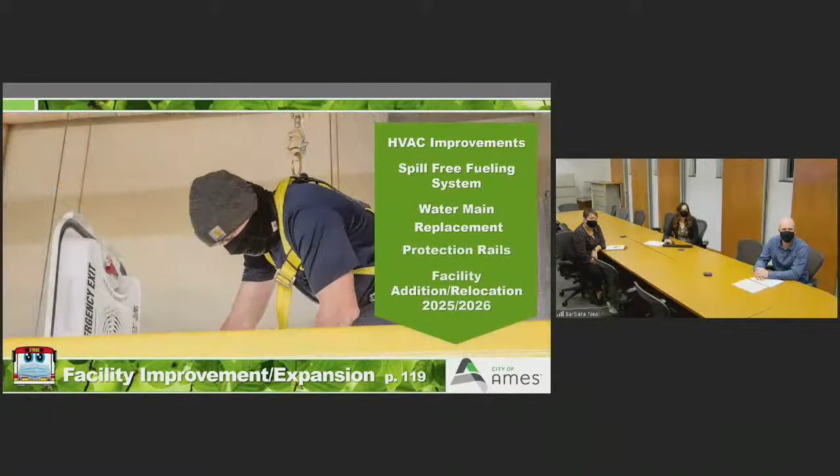We have allocated funding for fall protection rails. As you can see, this is fixing a hybrid bus here, but these rails will provide additional protection for personnel maintaining the articulated buses.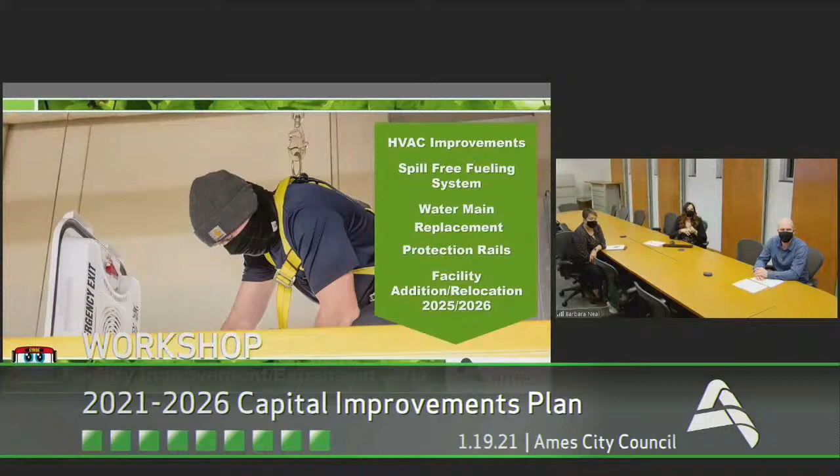We did put the facility expansion or relocation on hold for another year as we adjust to declining ridership and really focus on right sizing our fleet and facility to determine the best path forward for us. We do have it programmed in 25 and 26. We've put $750,000 into the CIP to either expand where we're at or look to a new facility if there are grant opportunities available and if operations warranted. Currently, we have about $715,000 in local match for any kind of facility improvements or expansion.

Next, we have technology improvements, on page 120. Advancements in transit technology have really grown significantly over the past several years, and Cyride will continue to support innovative technology that preserves access to our current riders, helps us attract more riders, and helps improve overall system efficiency. The role of technology is going to be especially critical this next budget year. With expected decreases in ridership and revenue, we plan to increase the amount of data collected from the system, leveraging existing and emerging technologies to identify efficiencies in areas where we can improve.

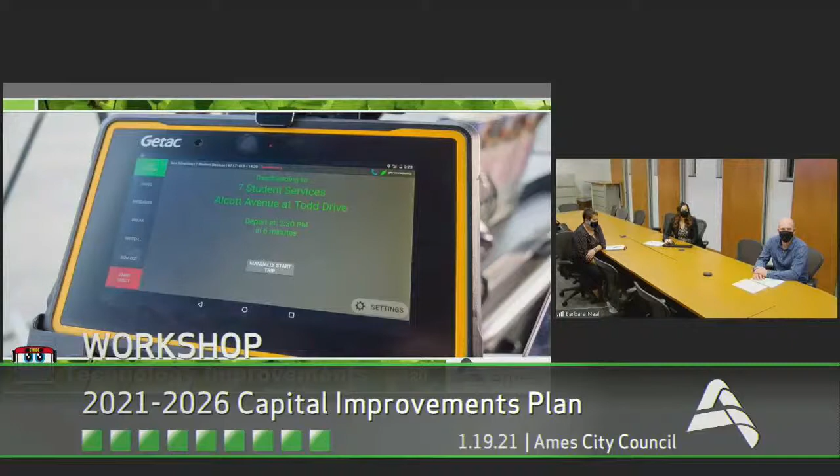Cyride did submit, and I know you guys approved this in the MPO, a federal grant application in 2020 to deploy this technology across the entire fleet. We were notified this afternoon that the project was awarded, at 95% of what we had requested, which is fantastic news. Because of this funding, we'll be able to install those APC counters across most of our fleet. It wasn't fully funded, but 95%. So this will happen much sooner than we were anticipating, and it will reduce the cost to the local funding partners.

We will also continue to invest in bus display monitors on the vehicles that will visually display the next stops along the route, and that will help passengers with disabilities.

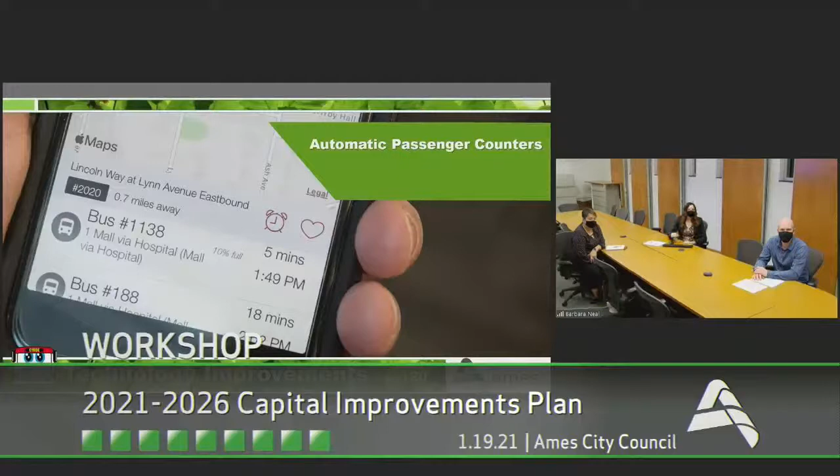Cyride had a regulatory requirement to develop and certify an agency safety plan, so Cyride is going to invest in safety software to help manage this compliance. The software will improve operational performance, simplify reporting, and provide analytical data to help us mitigate risk as well as support safety and continuous improvements.

Under technology, we also have facility technology. Upgrades to facility technology encompass two areas. Technology originally installed in the Cyride facility is now over 10 years old and has become obsolete, so we'll be replacing some of that. We will also be investing in upgrading our facility Wi-Fi system with additional receivers so that we can pull security camera information through the Wi-Fi.

Bus stop improvement plan, page 121. Cyride 2.0 and the pandemic have created a significant shift in ridership patterns, leading to a reduction in the amount we budgeted in FY22 and 23. We've budgeted $25,000 this year in the CIP for smaller projects to make minor upgrades to stops in response to community feedback. We'll be updating the bus stop improvement plan in a more stable ridership environment to determine patterns and ensure upgrades enhance service for the greatest number of riders. We've increased funding in subsequent years to reflect that.